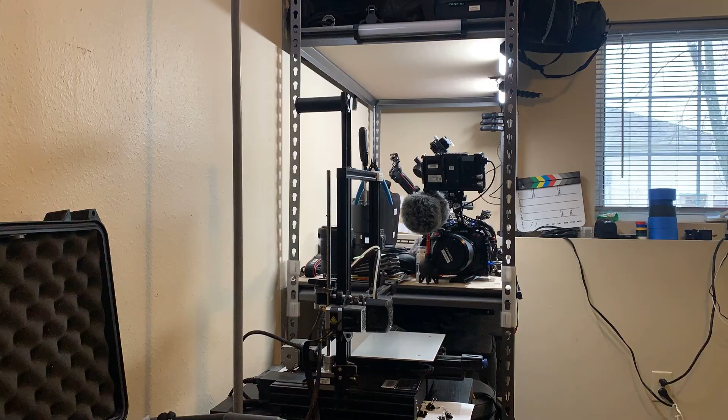Today I'm actually doing some 3D printing. I don't have a gig, and I think I'm going to be changing my titles for my vlogs to something universal rather than having gigs or video gigs or anything like that, or episode numbers as well. I think eventually it'll get to a point where the numbers kind of don't matter anymore, so I don't really want to keep the number system up.

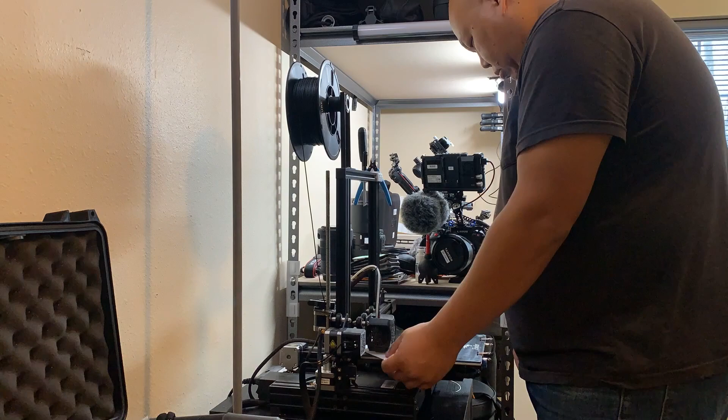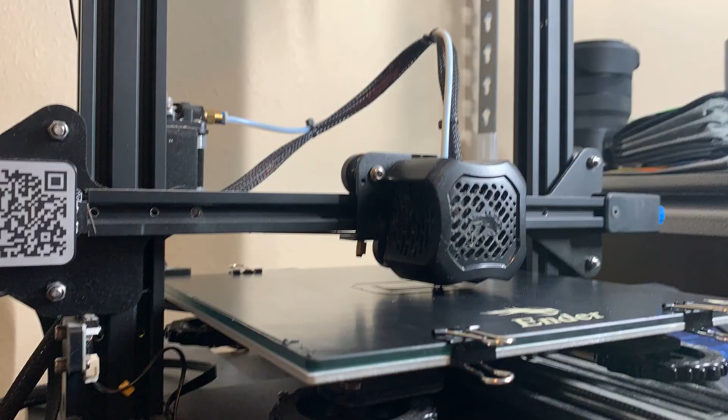But I am printing out my UltraSync 1 case that I designed for someone. They saw my vlog a while ago and they've asked to buy it from me. So that's what I'm doing here. But the main bulk of the video is not this case actually. It's a new design for my shelving. I want to store tools on the side when I work, when I build my cameras, and when I assemble stuff. So the whole video is about that.

So while that's printing, I apologize, 3D printers are kind of loud, and I'm setting a time lapse for it with my phone here. I think it's on my V mount, so it won't die. But I kind of want to show what I want to do here.

So I have my tools here that I use all the time, like the screwdrivers. These are brand new because I want a single screwdriver for each flathead and Phillips. And I use the pliers a bit. I use scissors a lot. So I want to design something to put right here, something magnetic, that I could just clip on here and that will fit in here perfectly. It doesn't need to be beautiful, but something functional, and I can take it off whenever I want. Nothing permanent.

So I'm gonna measure this area here, these little gaps here, and see how well I can design something. I want to be able to just leave my tools inside like this, pliers and scissors. So far, I use these the most. I bought a brush so I can actually clean my space here. I don't know if the brush will go in or not, we'll see. But so far I'm gonna just create something here to fit the magnets.

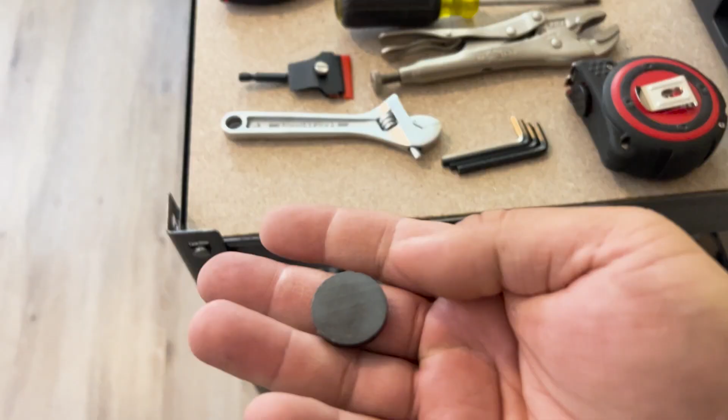For context, I want to reuse these magnets to be the ones that hold my printed part in place here. I don't know if it'll be like that. I might try to make it like this. It might not work very well. We'll see. But yeah, this is what I want it to be, so I could just go in and out. I'll probably super glue it or double-side tape it into the print.

These I used for my cases, and that's why there's double-sided tape here. I took them out after I bought my Jason case lids. So they're just laying around doing nothing. I think I might have a few more, I don't know. I might not, we'll see. But if I need more, I'll just buy more. So that's the idea. So let's see what I can do.

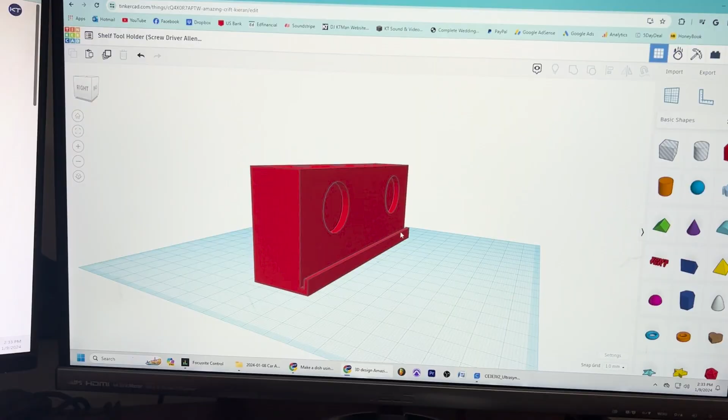So this is the design I've created for the shelf. I've decided not to go that crazy. I was trying to measure angles and all that stuff. I was like, why don't I just go flat and just have the magnet on the bottom? I don't need to make it so complicated.

So I'm just going straight down on the shelf and then have the magnet hit the little area where the bottom part of the shelf would hit. And I think that will work fine here.

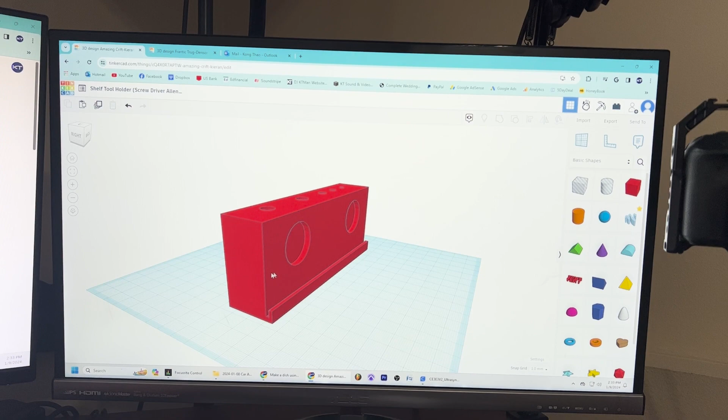What I have here so far is two screwdriver hole placements and then three wrenches, or Allen wrenches, here. And this little lip here, this is upside down. So this bottom portion here is actually the top. And I have this little lip here to kind of hook the top portion between the board of the shelf and the actual framing.

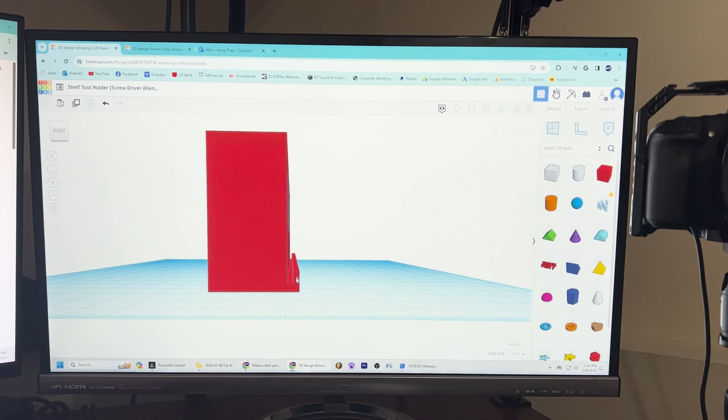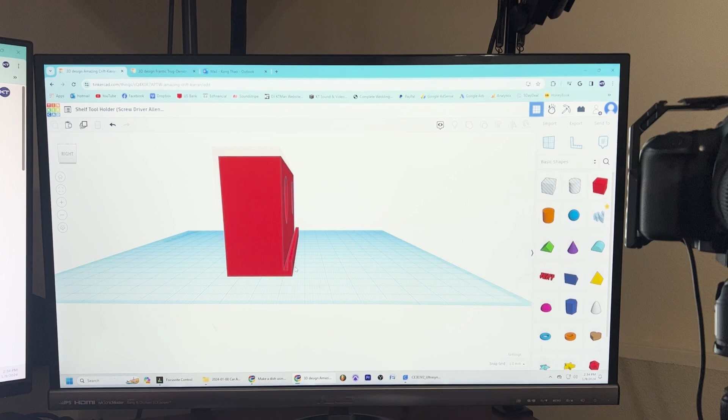And I think these are going to be good measurements. I hope they are. I need to double check that as I'm doing that now, but yeah, the magnet is eventually going to fall off. You know, magnets, they're not that strong, and it's not like it adds friction or anything. So I decided to create a little lip idea here to help alleviate that.

The reason I printed it upside down is because, as I mentioned earlier, about supports. If I try to print this the right way up, I'm going to need supports down here to create this part. And I don't want to do that. That wastes more material and more time and it's inefficient.

The circle here shouldn't need support because since it prints bottom up, it just prints the area there. And as it gets up here, it gets strong enough to create that. So yeah, that should be okay.

I keep trying to adjust my phone going through this.

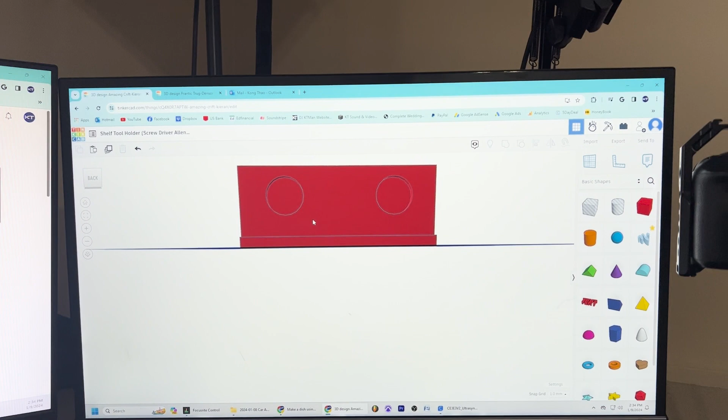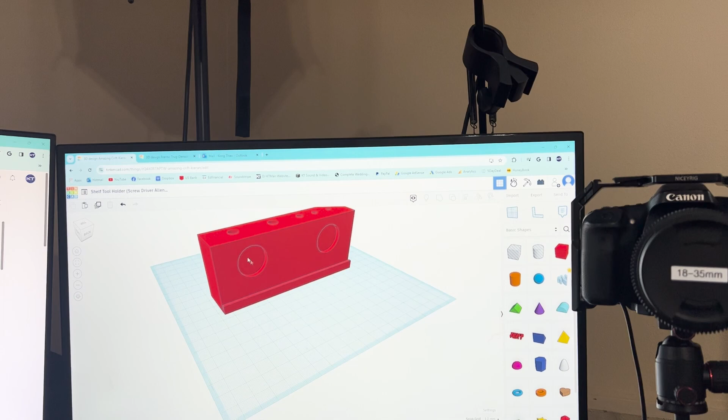But yeah, this is that portion here. And I have another one over here. Originally, I was going to print them at the same time because I felt kind of confident. But then as I kept going, I was like, no, let's do one at a time and see how it goes. So I'm going to do this one first and see if the magnets fit. And then after that, I can print the other one. So yeah, just to reduce time eventually.

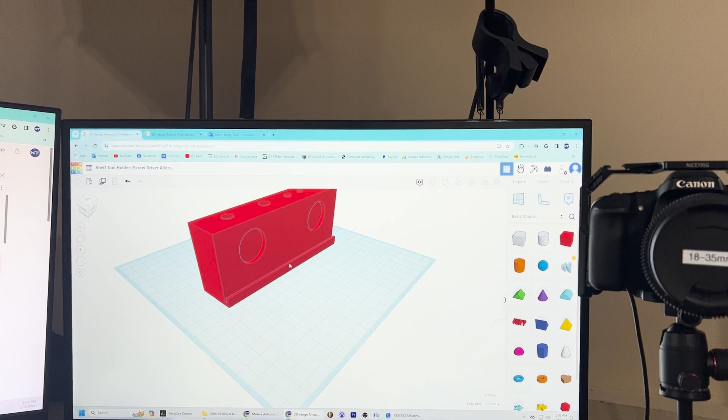I think it will fit. I'm pretty positive. If not, I will make it fit or I will redesign it a little bit, but I probably won't need to. So yeah, this is the design so far. And once I'm done printing the UltraSync holders, then I will start printing these with my PLA.

So I changed the design up a little bit. Having the circles there, I mean, that's cool if you want to make it seamless, but I was like, why do I need to do that? Because no one's going to see down there. It doesn't need to look pretty or anything like that.

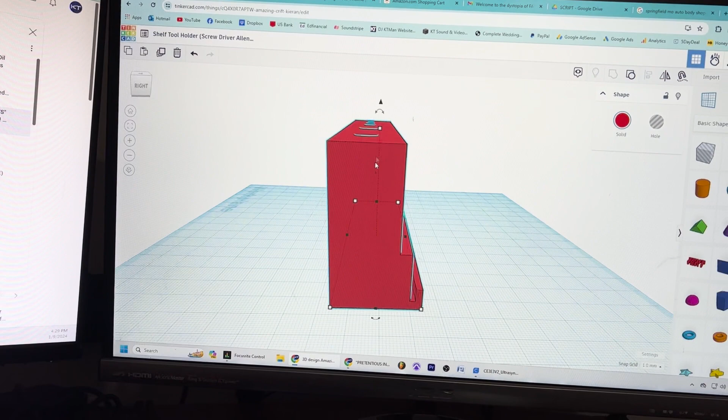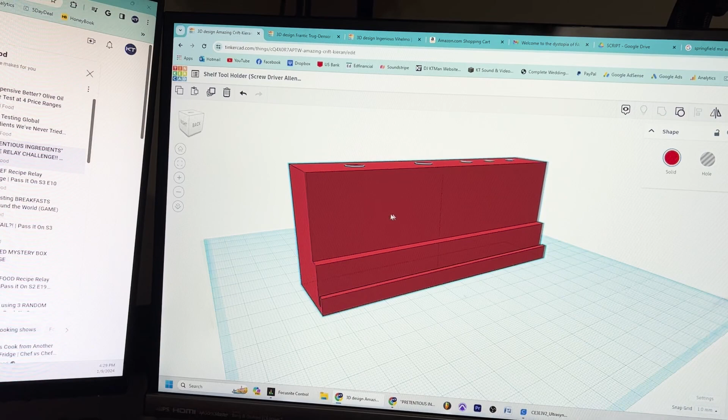And I just decided to make this entire space here a space where I can put the magnet wherever I want. Because I felt like the magnet needs to be at the little edge of the bottom portion of my design. And the way I had it was down here a little more, a little bit towards center, and it didn't feel right. So I was like, wait, why do I need to make it look good? No one's going to see it. So I decided to do this.

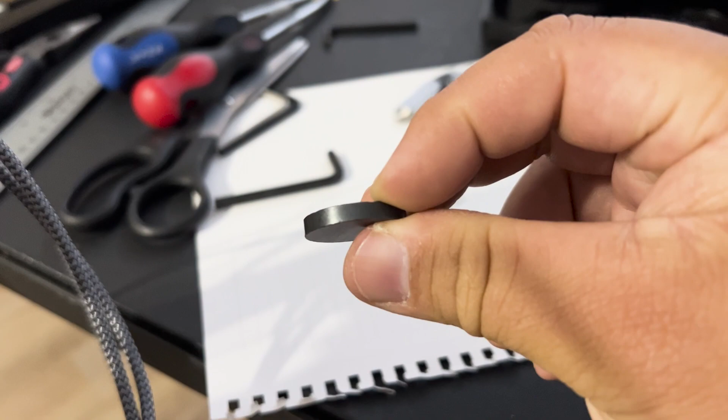This is 4 millimeters right here. These magnets measure 4 millimeters depth-wise. So I changed the design to that. Here's the other one, same thing. So it's going to be pretty cool.

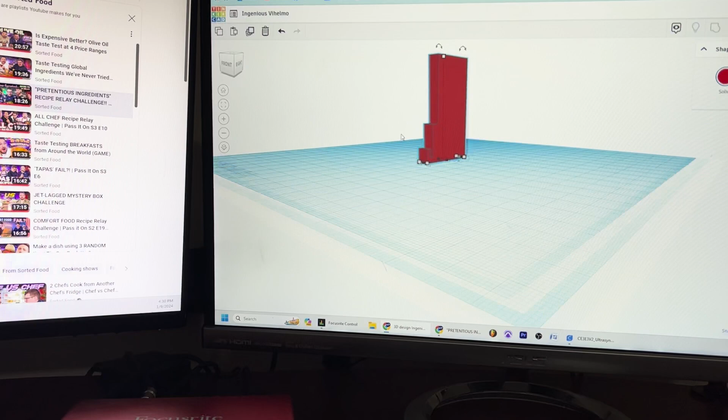I think it'll work. And I've decided to make a test print as well, because if this hook doesn't work, I've spent maybe 5 hours printing. These would probably take like 5 hours, maybe a little less, 4 hours, I don't know. These take a long time. So I've made a little test print here and hopefully that can print in a few minutes.

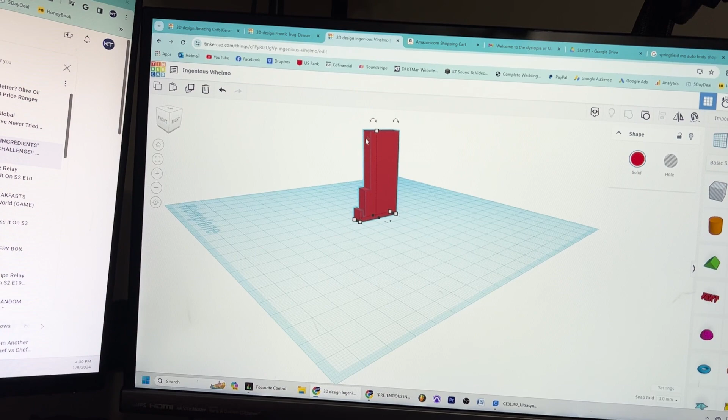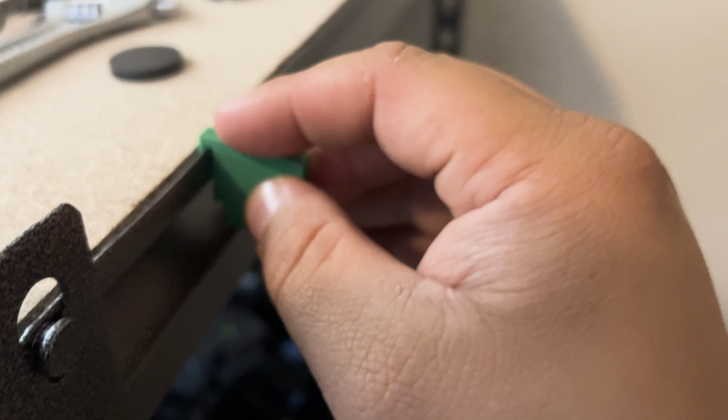And yeah, I want to go all the way up there because I want to see the magnet as well, like see where it will sit. So the test unit just got printed. I actually reduced the height of it because I didn't want to wait 50 minutes for this, so I cut it down a little bit. But it seems to fit very well here, and I'm very happy. It's just perfect, honestly. So that's good.

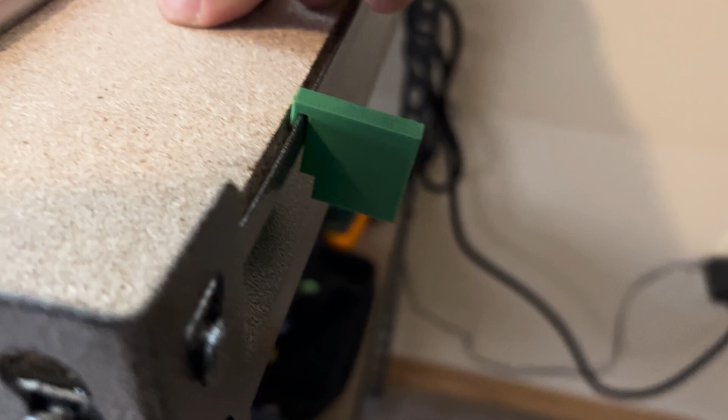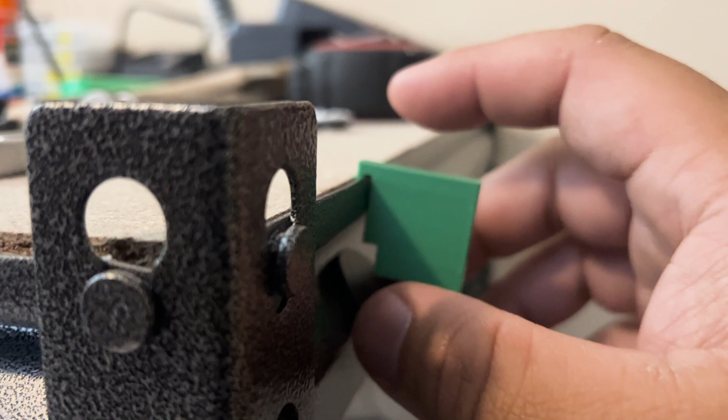I did kind of do a test with the magnet, and I think with the magnets there, it'll fit perfectly fine. So I'm gonna go ahead and print the 2 units and get things started. Let's do this. So I actually ended up deciding to print both at the same time. I was pretty confident in it working right away, so I went ahead and did that.

And also because it will probably take like, I don't know, 6 hours to print one. I didn't want to wait 6 hours. It was 10 p.m. by the time I actually started printing, and I did not want to wake up in the middle of the night just to do it. So I printed both. All right, so this turned out great.

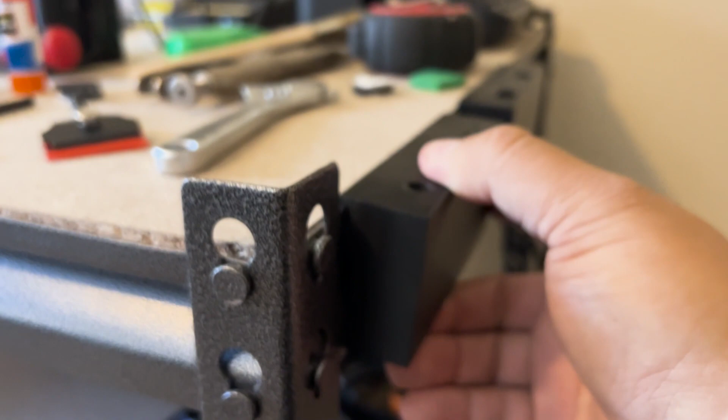And so here's one of them. This is without the magnets for now, but it'll just fit in without magnets, and I love it. Here's the other one, the one that's going to be used the most likely. This also does the same thing. You could just not use magnets. It just protrudes at an angle a little bit more. If you can see that, that's like if you have a magnet in there.

So we'll put the 4mm magnet in, put this in, and it's more straight. So the magnet will probably let it stay a little bit better. But if you don't want to use magnets, you don't have to. And I might design one that doesn't need magnets. Who knows? We'll see. Basically, instead of this indent here, I'll just have it go all the way down. But I'm gonna put magnets on it anyways, just because I want it to actually stay a little bit better.

But here, I'll give you an example of how it would look with the tools. So here's my largest Allen wrench I use, medium, I use that way more, small one. I kind of want to get all silver so I can see it. It's kind of hard seeing black on black. And then here are my screwdrivers. Phillips goes right in. And flathead, which I use the most. And it fits perfectly. I can grab it with ease, no problem.

Over here, pliers go right here. And then my scissors go right there. Yeah, this is amazing. And I will probably save a preset of some sort and design more. I might make one for a clip on the side or something. I don't know. Once I use more tools, I'll probably start designing more sections for tools. I don't want it in the front though, because I don't want to knock it off. So I'm gonna keep it on the sides.